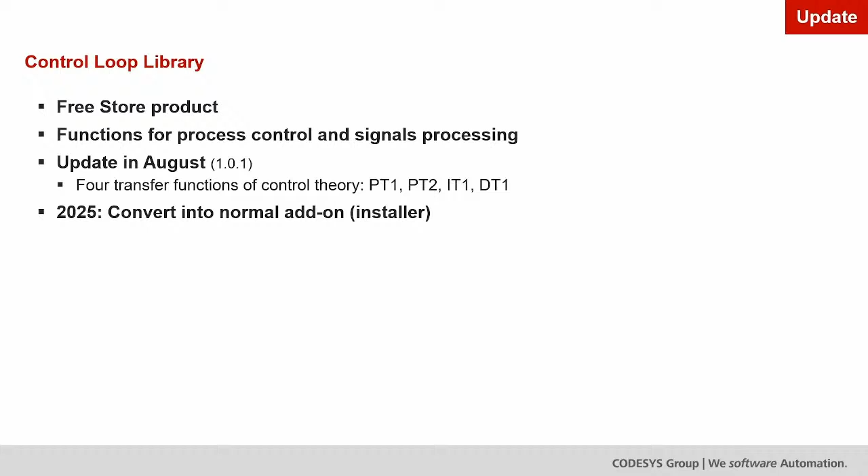We also did maintenance of our CODESYS IIoT libraries in May and August, of our Android apps CODESYS Web View, CODESYS Sensor App and CODESYS Forge in April and August to comply with developer policies and Android 14 API, and of OSCAT's store library OSCAT Basic in September to provide OSCAT's security fix as a CODESYS package.

Currently, we are still working on the CODESYS simulation interface. The development of the basic functionality is reaching the end. We are preparing to show multiple simulation tool integrations at the SPS fair as prototypes.

The release date will now be in January next year. The simulation interface will require the PDE license. And the update of the application composer is moved to March next year.

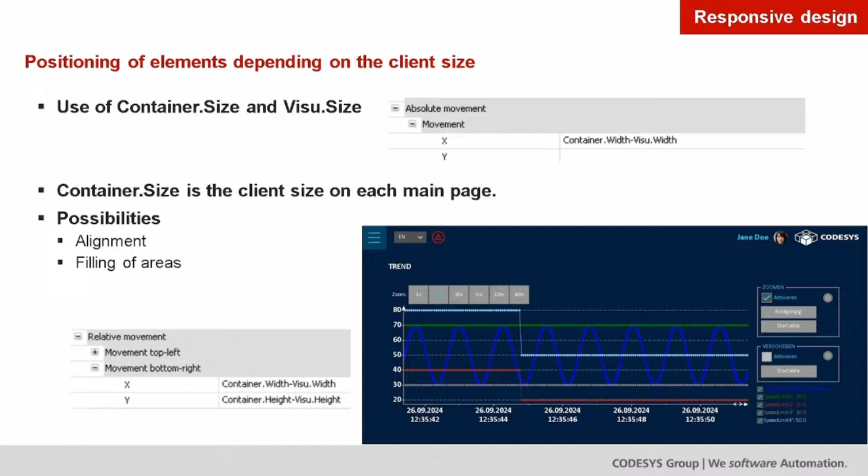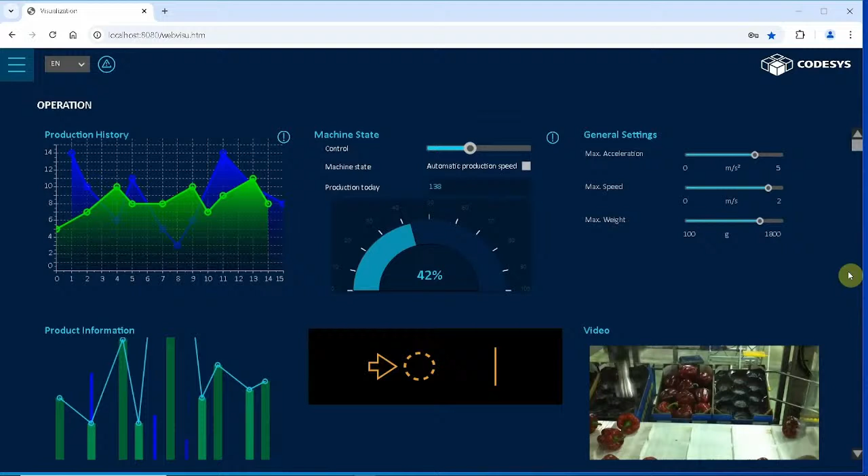I want to show you the responsive design features in the example project. At the moment we are in full screen mode, no scroll bars are shown. When I change it, scroll bars appear, and when I reduce the client size, content is wrapped to the bottom of the page.

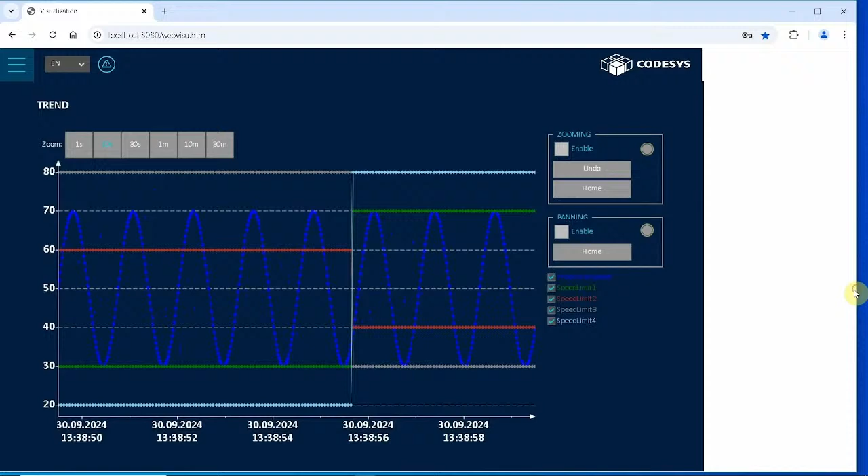The same happens on the trend page. The trend increases automatically and fills the new area. On the settings page, when I reduce the client size, the packing object is wrapped to the bottom, and I can scroll the content.

The next topic is client-specific localization. Each visualization client can have its own language. Clients start with the browser language, DE or EN for example, and the browser language codes must exist in the text list. If the language does not exist, the standard language is used. Language switching only takes place in the current client, so each client can have its own language.

Now we come to alarm management. New features allow online changes in the most common use cases, for example, add, remove, or modify alarms in an alarm group, or add, remove, or modify alarm instances in an alarm configuration.

Another possibility is to use alarm group templates for types that come from another library. Alarm group templates can be used to specify alarms for a specific type, like a function block or a structure.

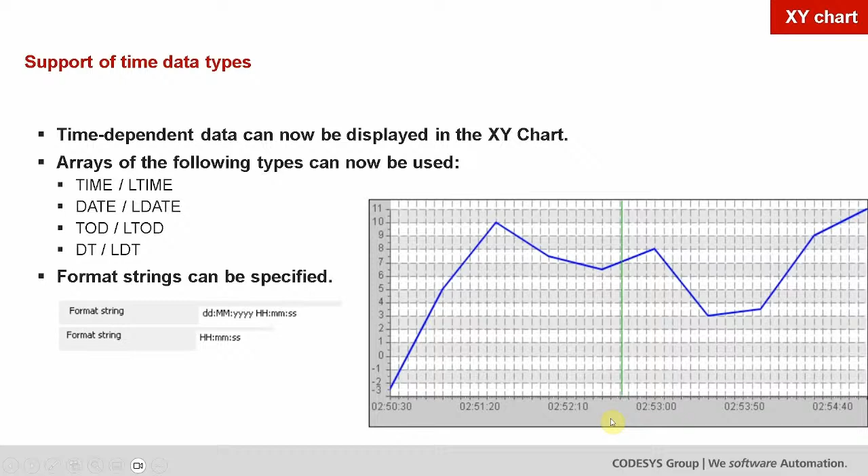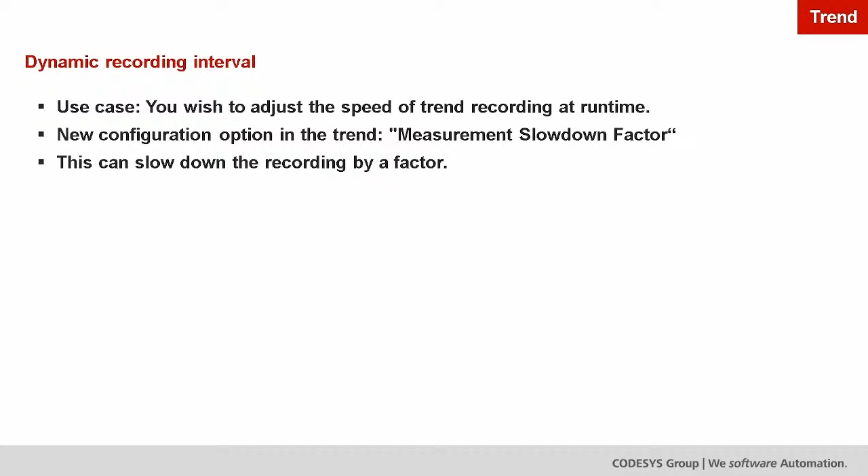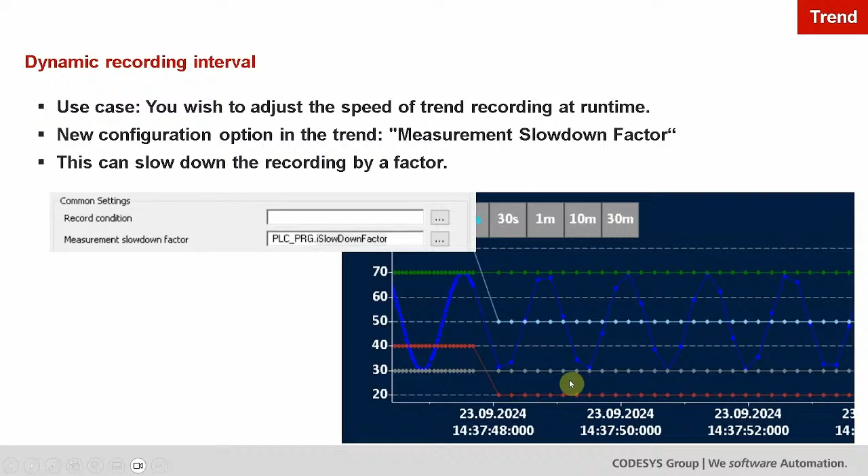In the trend, we now support a dynamic recording interval. The use case is you wish to adjust the speed of the trend recording at runtime. A new configuration option is provided in the trend. This can slow down the recording by a factor. Here is the configuration measurement slowdown factor, which can also be a variable. So now it's possible to reduce the recording speed at runtime and also to fasten it up.

The last topic is the visualization scripting step 1. In the visualization step 1, you can create or modify visualizations via CODESYS Python scripting. So you can create visualizations, add elements, remove elements, and modify elements in this visualization. You can change the properties.

Here you now can see an example code. First we get the primary project, then we find the application. In the application we create a new visualization object. Now we get the element list of this new visualization object and can add a new rectangle element and set the position. In the first step it would be possible to set element properties, configure input actions, and set frame references.

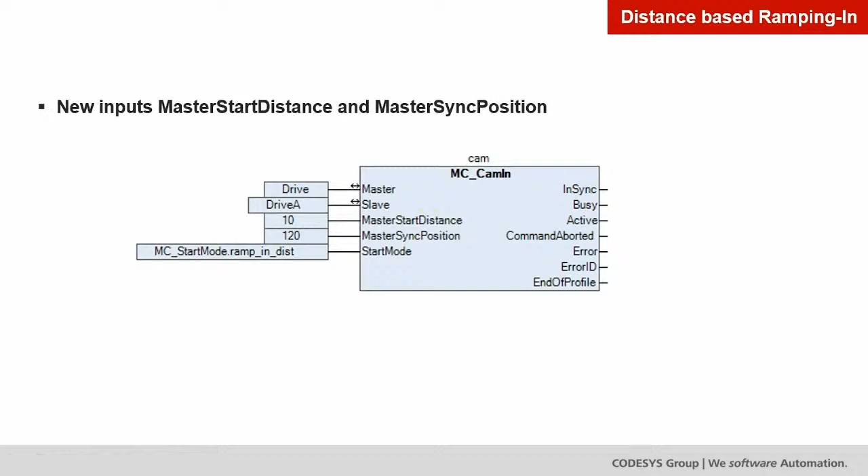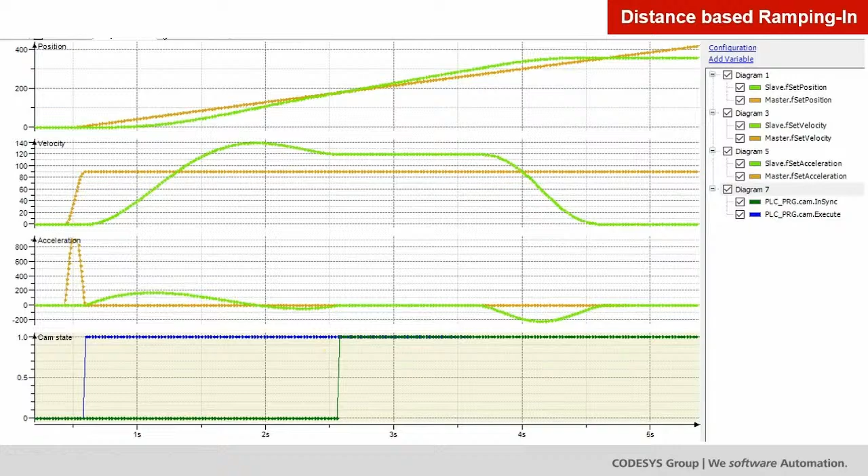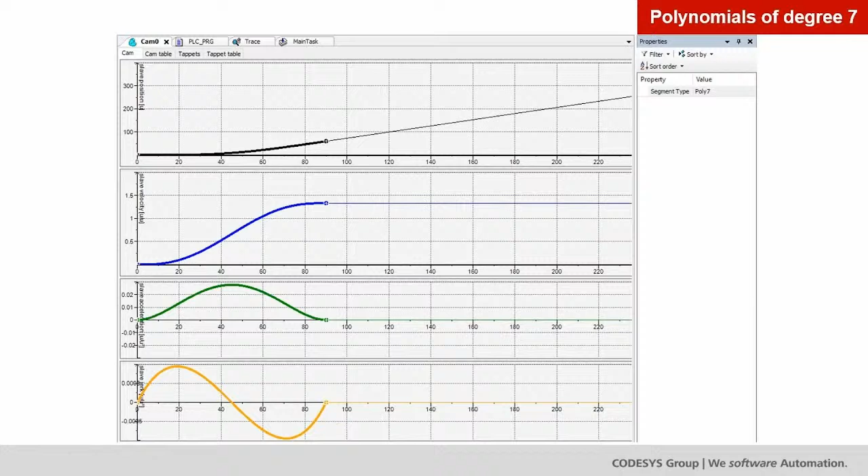Another new thing is the so-called Cam Builder API. So what is the Cam Builder API? It's meant for creating cams from the application, from IEC code. This has been possible so far, but you had to fill in internal data structures, so it wasn't very convenient. And the Cam Builder offers a very nice and comfortable and efficient API to create cams.

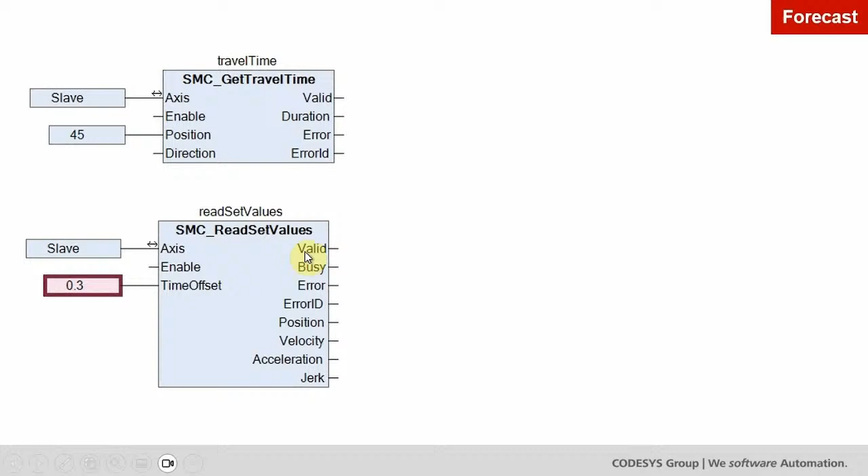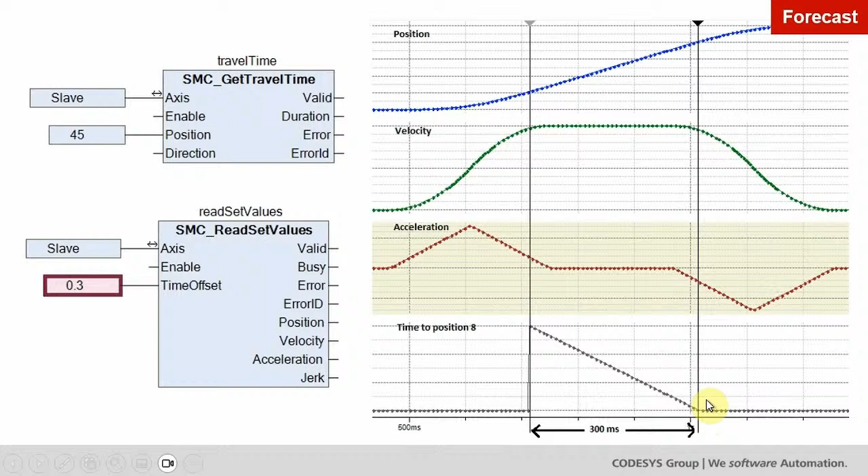So that's the end of my presentation. Thanks for your attention. Very interesting, Georg Seidel. Let's come back to Hilmar Panzer again.

From Service Pack 21 onwards, devices that have a bus cycle task are specially marked in the device tree. The tasks that work as a bus cycle task also receive the same decoration, these two small blue circular arrows. A bus cycle task is important because this is where the exchange with the physical IOs takes place. If an incorrect bus cycle task is set, the variables are updated unsynchronized and often at the wrong time.

This is a problem that we regularly encounter in our customer support. We hope that this marker will enable the user to recognize more quickly whether the setting is done correctly. It can be changed in the tab IO mapping for the respective device or globally in the device's PLC settings.

Then we have decided to tackle a major topic in the area of devices and Fieldbus, online change for devices and device settings. This requires some far-reaching changes to the device concept and will probably be available only in Service Pack 22, that means in 2026. For the first step, we are concentrating on the drivers for the local IOs and for Profinet. I will give you an update on this in the next feature briefing.

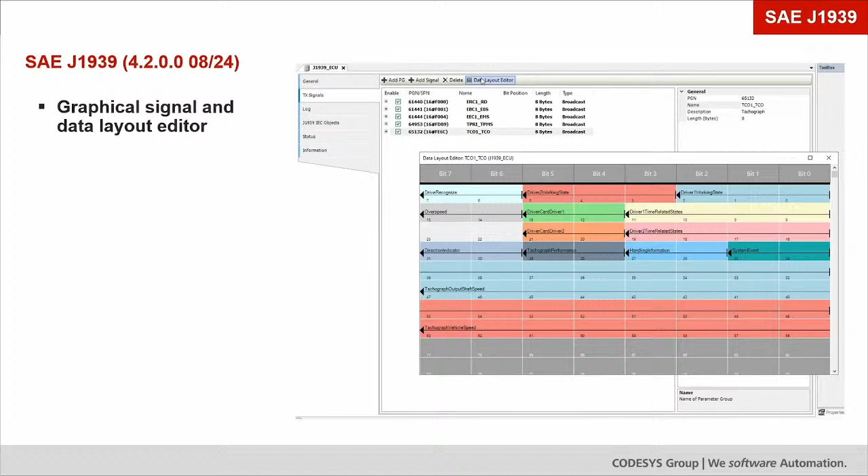In April, a new IO-Link version 4.3 was released, which includes a gateway interface. External tools can now read and write IO-Link parameters via this. Modbus was or will be updated in versions 4.4 in May and 4.5 in December, containing bug fixes and minor improvements.

EtherNet/IP was released as version 4.6 in June. This allows you to pass the conformance test 20. The connection API, which provides application-based access to the status and other properties of the connections, was originally also planned for this version, but will be included in version 4.7, which we will be launching in the next few days.

There are also significant runtime performance improvements, which are particularly apparent when the IOs are not mapped to distinct variables, but are located one after the other in the memory. A new editor in the scanner configurator is planned for 2025, which will provide an overview of all connections.

We also want to expand the interface for asynchronous services in the adapter, so that they also enable acyclical provision of data. Currently, the data must be provided immediately. That means in the same call. If the data has to be fetched from somewhere else first, for example from a file, this is not possible, as this would destroy the real-time property. With the new extension, we make it possible to provide a response a few cycles later.